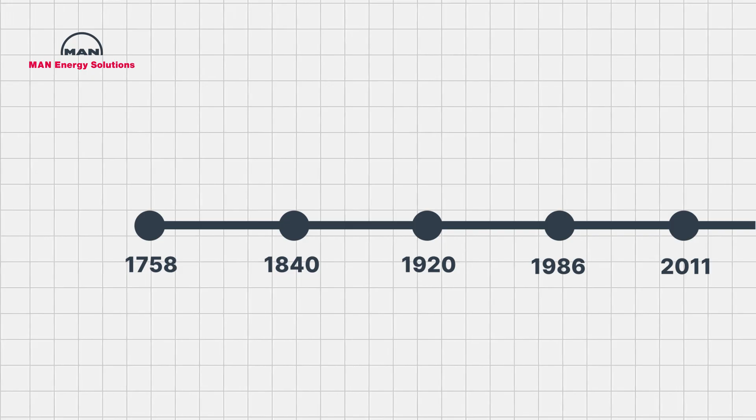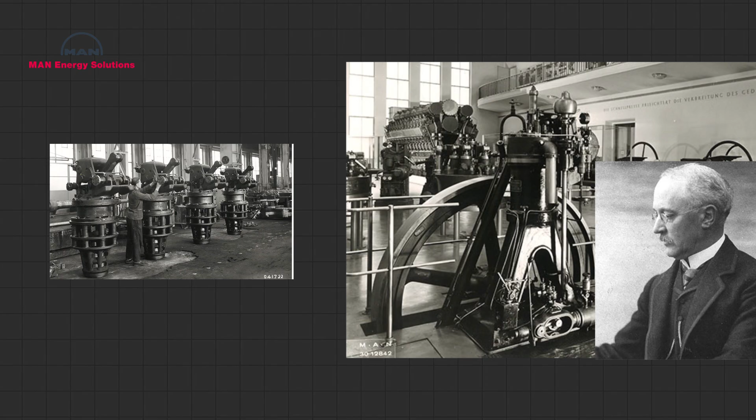Let's start with the biggest player, MAN Energy Solutions. Its history stretches back more than 250 years, but one invention changed shipping forever. In the early 20th century, MAN engineers perfected large marine diesel engines based on Rudolf Diesel's revolutionary ideas. The result transformed global shipping. Compared to steam engines, diesel engines were dramatically more efficient, more reliable, and far cheaper to operate. As shipping companies rapidly modernized, MAN became the industry standard.

Today, if you see one of the world's largest container ships, there's a good chance its engine traces its design back to MAN. But here's the truly unbelievable part. Many of these engines aren't actually built by MAN. Instead, the company licenses its designs to manufacturers across Asia. Companies in South Korea, China, and Japan manufacture MAN-designed engines under license, allowing thousands of identical engines to power fleets around the globe. It's a business model that quietly spread MAN technology to nearly every major shipbuilding nation, which means even if you've never heard the name, you've almost certainly benefited from it.

But MAN isn't alone. Its biggest rival comes from Finland, Wärtsilä. Unlike MAN, Wärtsilä became famous for a different approach. Instead of focusing only on the largest slow-speed engines, it expanded into medium-speed engines, power systems, hybrid propulsion, digital monitoring, and complete ship propulsion packages.

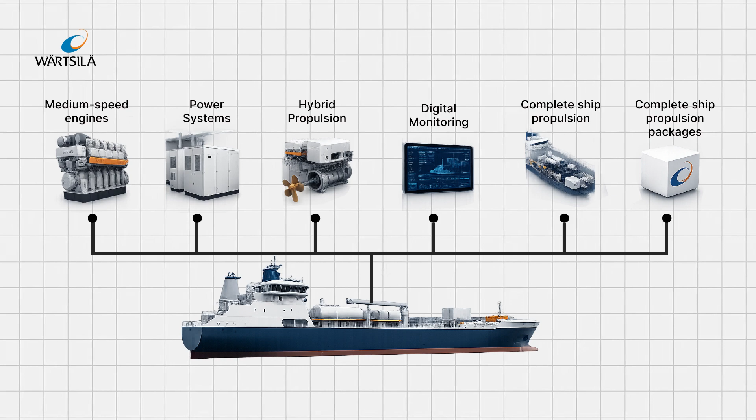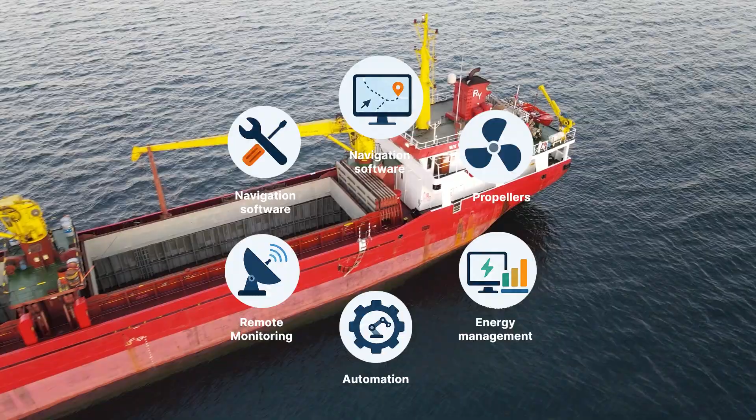Today, Wärtsilä doesn't just sell engines, it sells entire ecosystems, navigation software, propellers, energy management, automation, maintenance, even remote monitoring systems that predict failures before they happen. It's not simply building engines anymore, it's building intelligent ships.

And that's becoming increasingly important as the shipping industry races toward lower emissions and greater efficiency. Because here's the problem: shipping carries almost everything we buy, but it also produces roughly 3% of global carbon emissions. That's comparable to some entire countries, which means the companies building these engines aren't just competing for power anymore. They're competing to reinvent shipping itself.

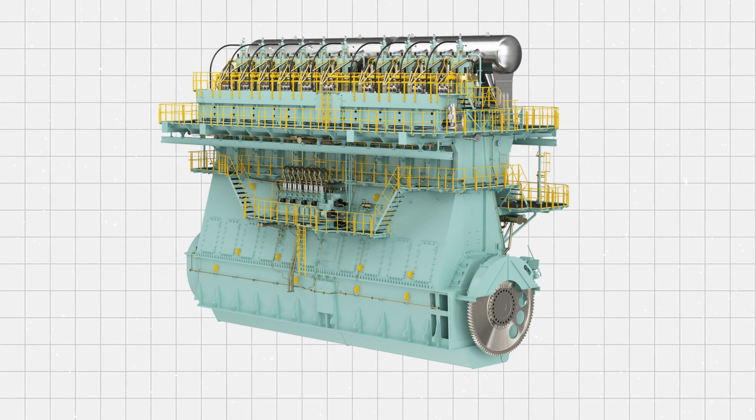Now let's talk about the engines, because the numbers sound almost fictional. Take the famous MAN B&W 12-cylinder low-speed engine. It's taller than a 4-story building. It weighs over 2,000 tons. Its pistons are larger than most people. Each one moves up and down with incredible force, producing more than 100,000 horsepower. That's enough power for dozens of Formula One cars from a single engine.

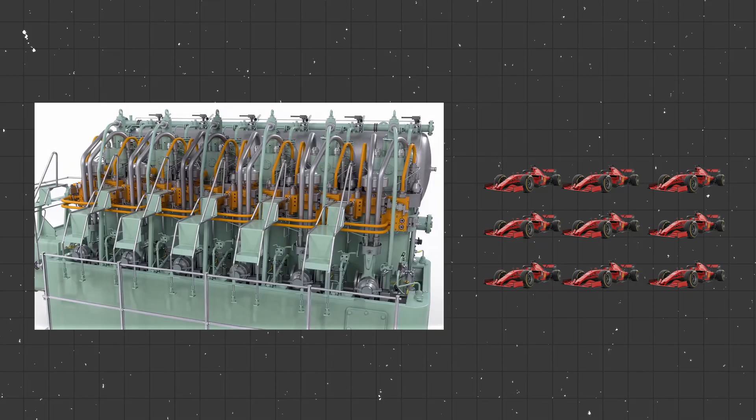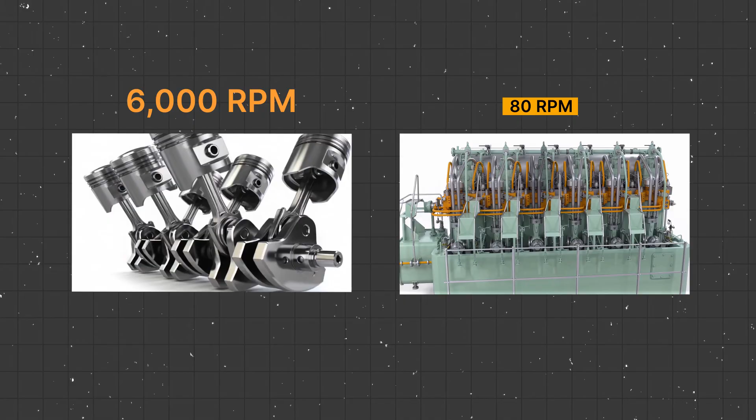And despite its size, it turns surprisingly slowly, just around 80 revolutions per minute. Compare that to a car engine, which can easily exceed 6,000 revolutions per minute. That sounds inefficient, but it's actually one of the secrets behind these engines. Running slowly allows them to achieve incredible fuel efficiency while producing enormous torque, perfect for pushing ships longer than 4 football fields through rough oceans. It's engineering on an almost unimaginable scale.

But here's something even more impressive. These engines are designed to keep running for decades. A commercial ship may spend over 250 days at sea every year. The engine might operate almost continuously for years, interrupted only by scheduled maintenance. Some accumulate well over 100,000 operating hours during their lifetime. For comparison, many car engines never reach a fraction of that.

Every component, from crankshafts weighing hundreds of tons to precision fuel injection systems, must survive relentless stress day after day. That's why marine engines are often rebuilt instead of replaced. They're engineered like industrial infrastructure rather than disposable machinery.

The industry is facing its biggest challenge in over a century. Governments are introducing stricter environmental regulations. Shipping companies want cleaner fuels. Customers want lower emissions. Suddenly, diesel, the technology that built global trade, is under pressure.

MAN and Wärtsilä are now investing billions into engines capable of running on methanol, ammonia, liquefied natural gas, hydrogen, and other alternative fuels. Some ships are even becoming hybrids. Others may eventually use fuel cells. The next generation of marine propulsion could look completely different from today's giants. And whichever company wins this race won't just dominate shipping, it could shape the future of global trade for decades.

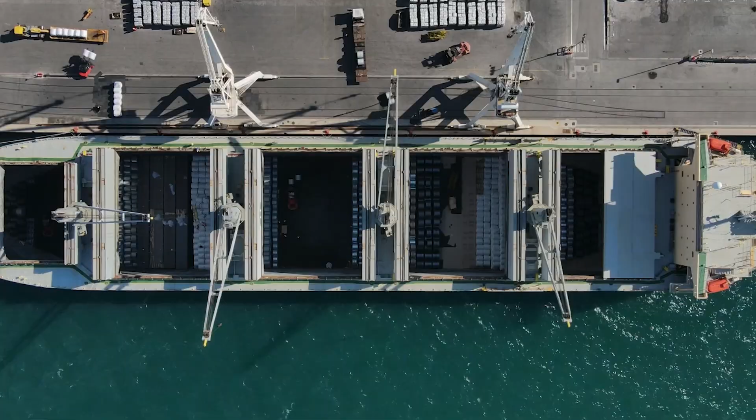So does one company really power almost every ship on Earth? Not quite. The reality is even more interesting. Two companies, MAN Energy Solutions and Wärtsilä, have spent generations becoming the backbone of the global shipping industry. Between them, along with licensed manufacturing partners, they influence propulsion systems found aboard an enormous share of the world's largest commercial vessels.

Most people will never see one of their engines. Most people won't even know their names. Yet every day, as millions of containers cross the oceans carrying the products that keep our lives running, these hidden engineering giants are quietly doing the same thing they've done for decades, keeping the world moving. Because while shipping companies get the headlines and the ships get the attention, the real heart of global trade has always been buried deep below deck, where thousands of tons of steel turn fuel into motion. And almost everything we own depends on it.